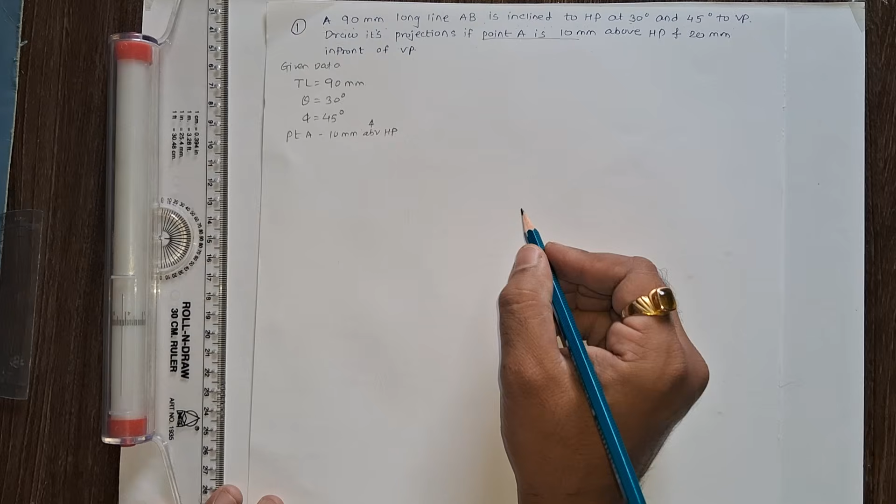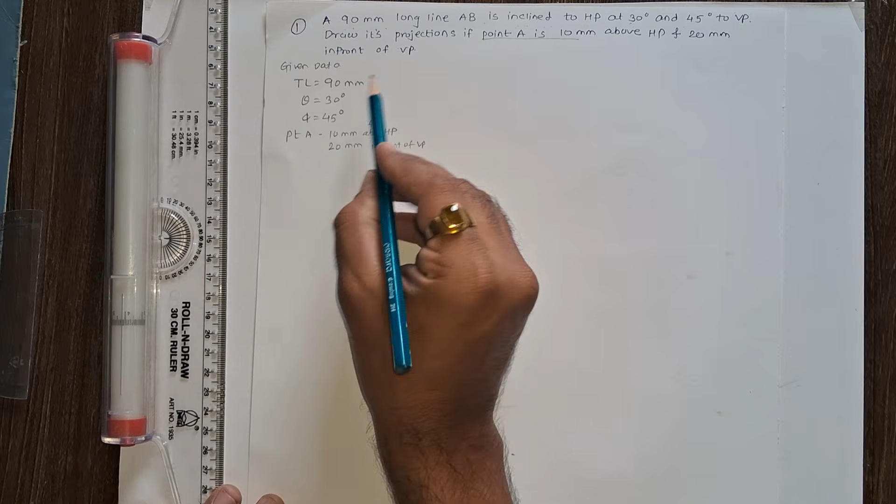We can locate this point above the XY line, and 20 mm in front of VP. In front means we can locate this point below the XY line. So we can solve this problem very easily. This is a basic level problem, and in this problem, true length, theta, phi, and point A location are given.

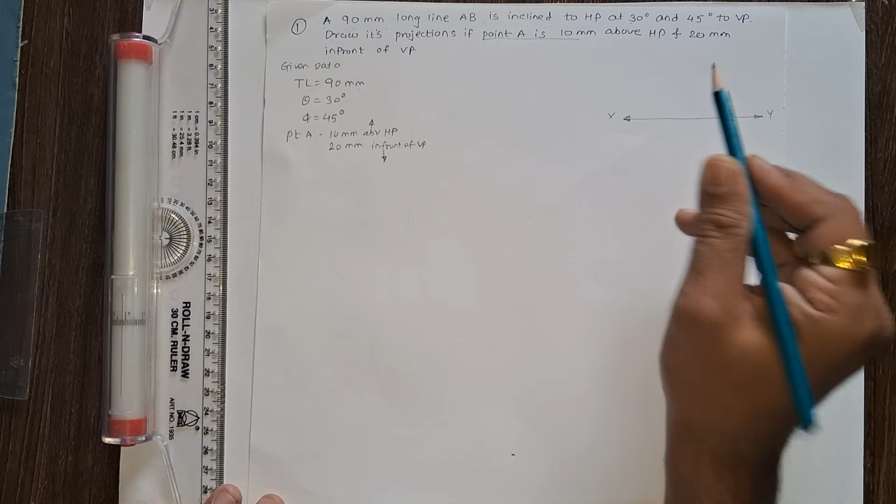So for this problem, we require a reference diagram. So draw this reference diagram. This is the XY reference line. You can draw this diagram freehand. This is locus of A dash, this is locus of A. Mark theta angle. This is point A dash, this is A. Mark phi angle. This is point B1 dash, B2, this is the true length. Project and then rotate. So this is a true length.

If you project this true length up to locus of A, I'll get a B1 point, and if you rotate this point, I'll get a B point. This length is called the plan length; if you join AB, I'll get the plan length distance. From B, we can draw the vertical line directly. I'll get a point B dash. If you join A dash B dash, I'll get the elevation line. It is also called the front view. This line is called top view.

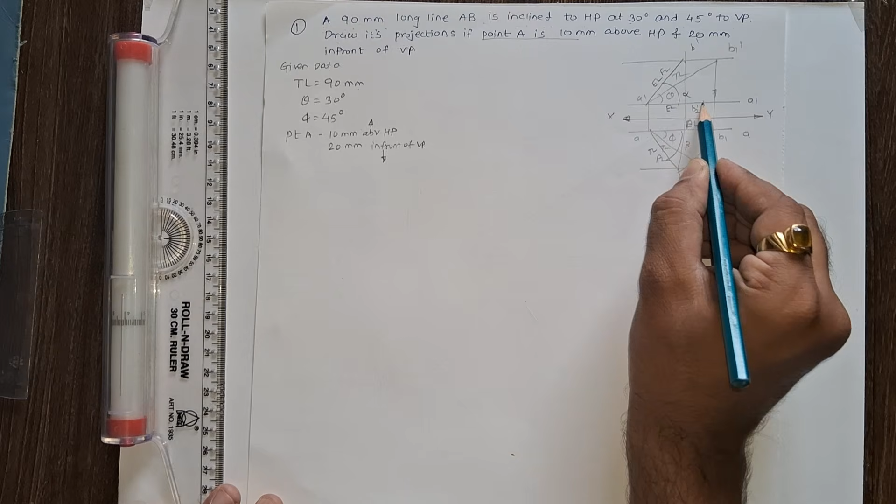So plan length makes beta angle with the reference line, and elevation length makes alpha angle. Here also we have the true length of this line. If you project this true length up to locus of A dash, this point is named B2 dash. This distance is called the elevation length. If you take this elevation length distance in your compass, and from A dash mark an arc, I'll get the same B dash point.

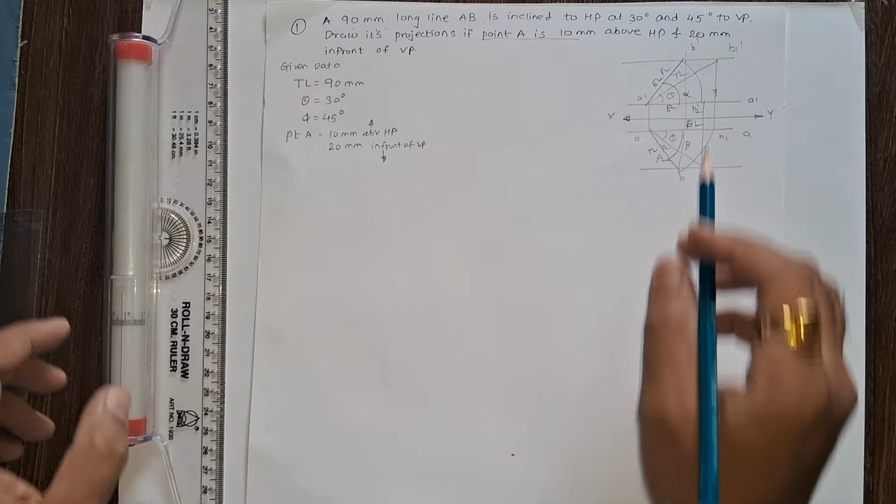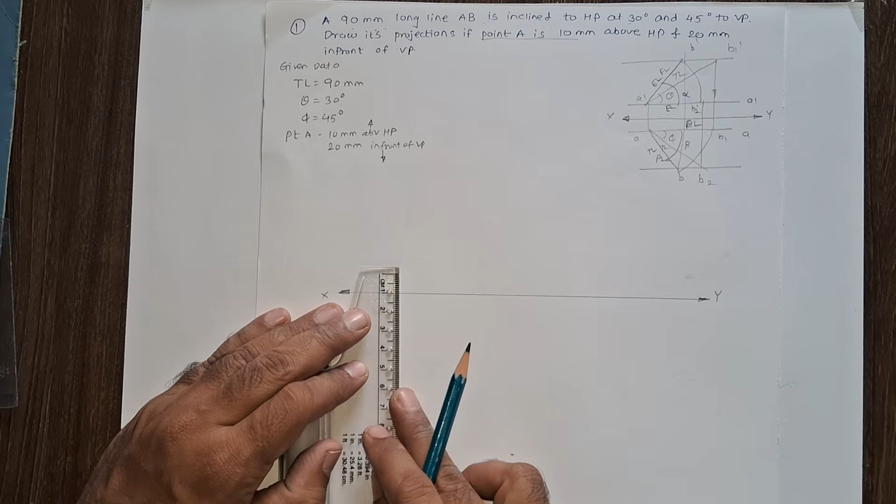So for this problem, for any line problem, we must know this reference diagram. From this, we can solve this problem. Step number one is draw an XY line or reference line. Draw an XY line. This is X, this is Y. Locate point A. Point A is 10 mm above HP and 20 mm in front of VP.

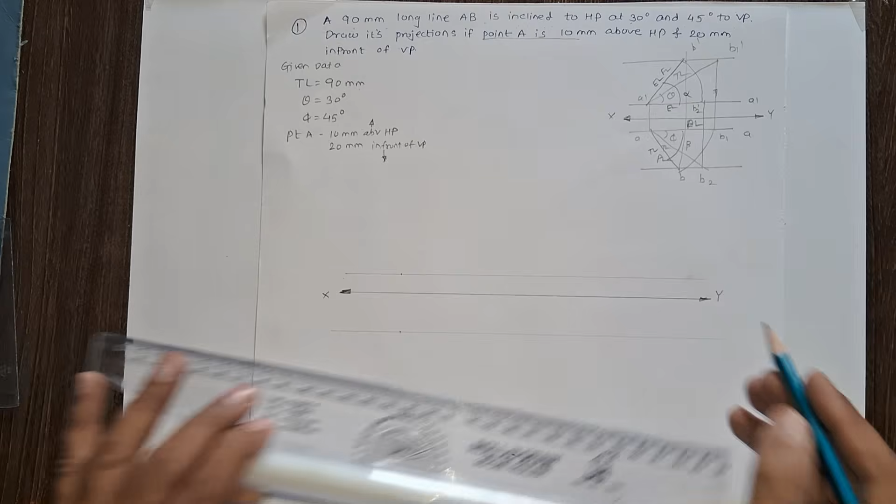So draw the locus line which is passing through this point. On this line, we can mark point A dash and A. This line is called the locus of A dash. This is the locus of A. On this, we can mark A dash and A.

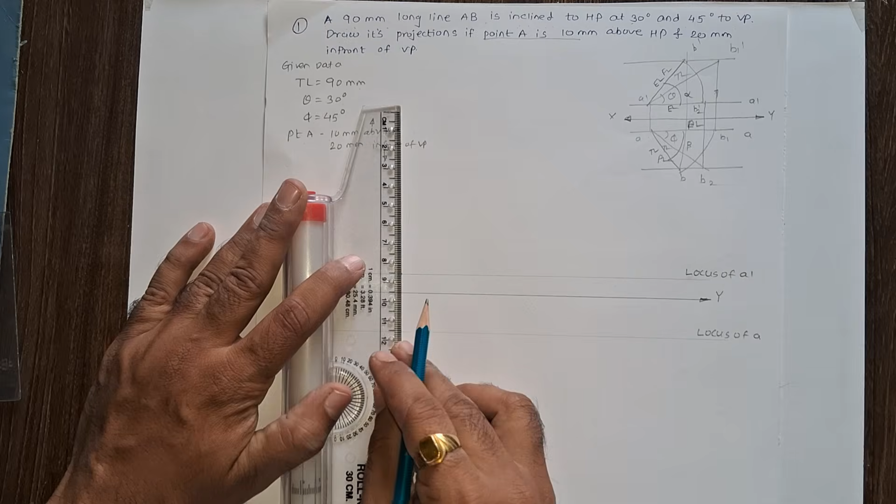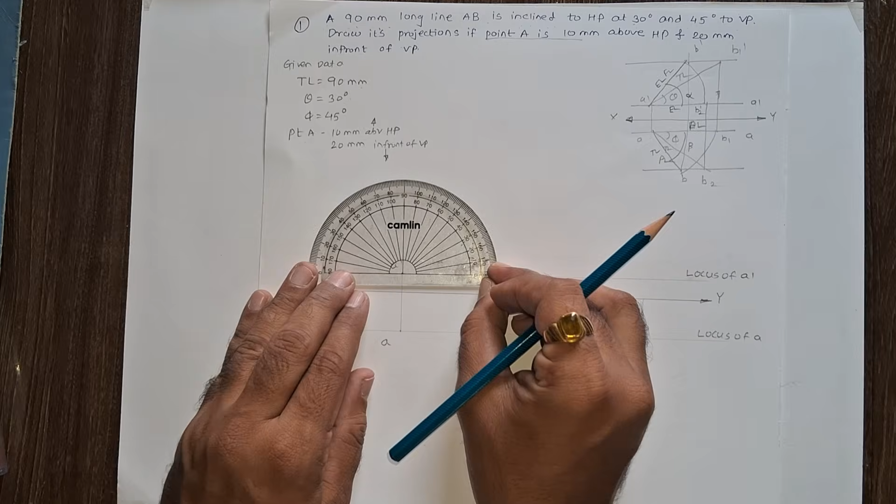So this is A dash point, this is A point. Now in this problem, theta and phi angle is given. So we can mark theta and phi. Theta is 30 degree, this is 30 degree, and phi is 45 degree. So this is 45 degree. So by using thin line, draw this theta angle line and phi angle line.

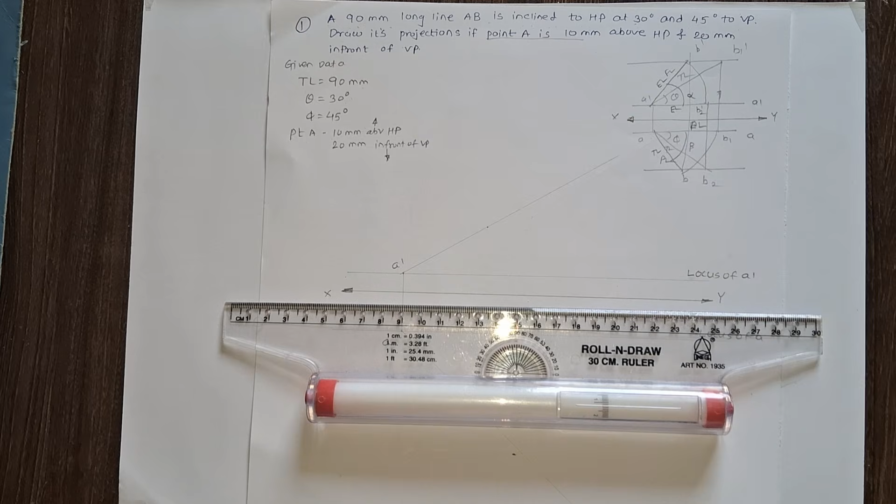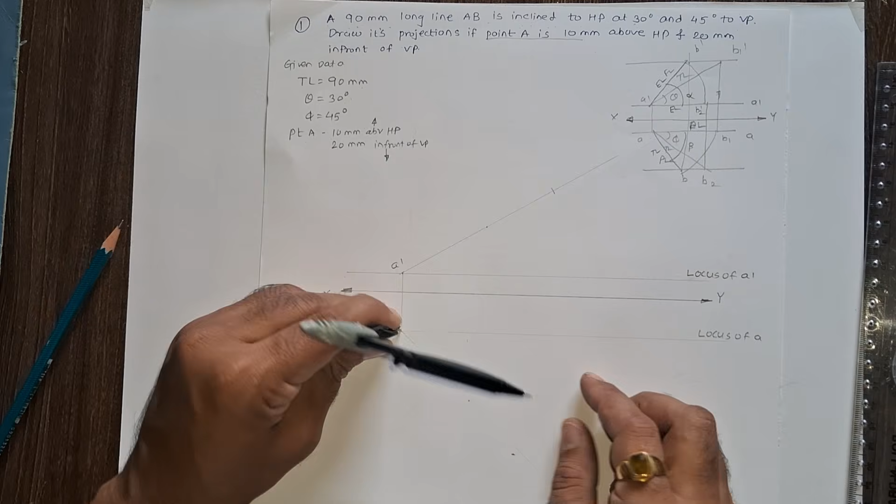Now true length is given. True length is 90 mm. So with the help of ruler, measure 90 mm distance in compass, and from A dash, mark an arc on this theta and phi degree line. So this point we get, this point naming is B1 dash. This you can see the true length point is B2.

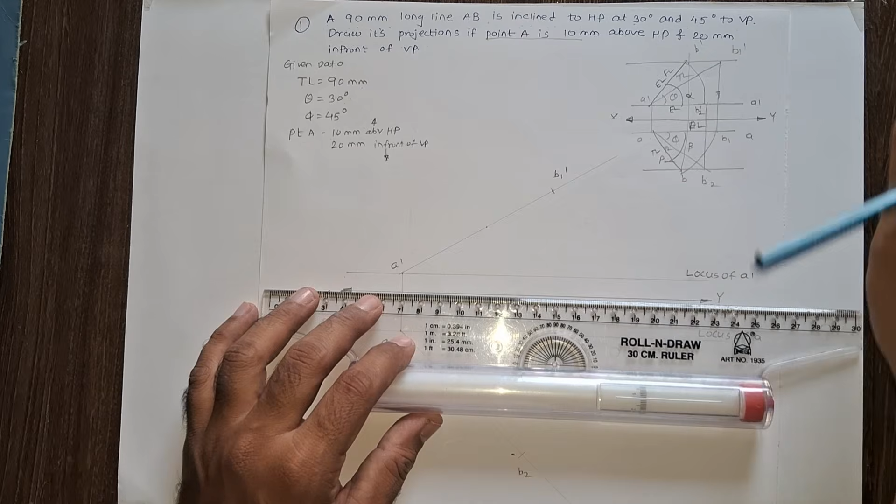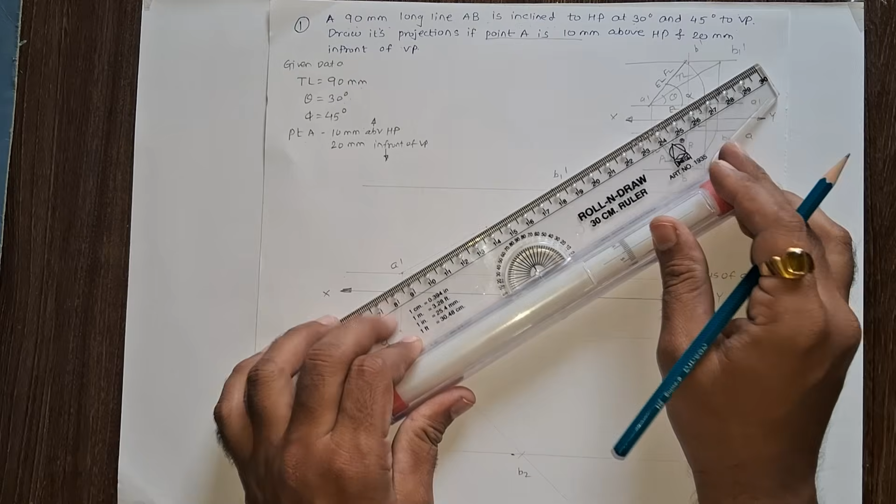Now from this XY reference line, adjust a ruler and draw a locus line of B dash and draw a locus of B. So this is called the locus of B dash. This line is called the locus of B. Now dark A dash B1 dash line and AB2 line.

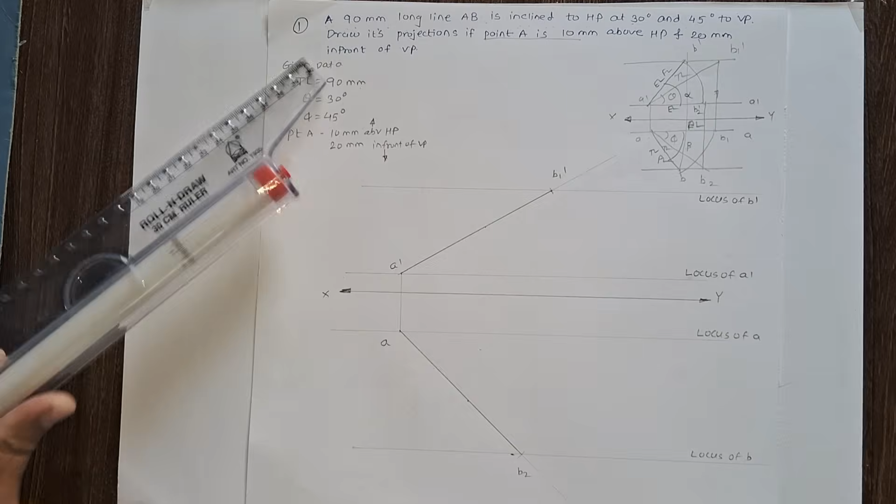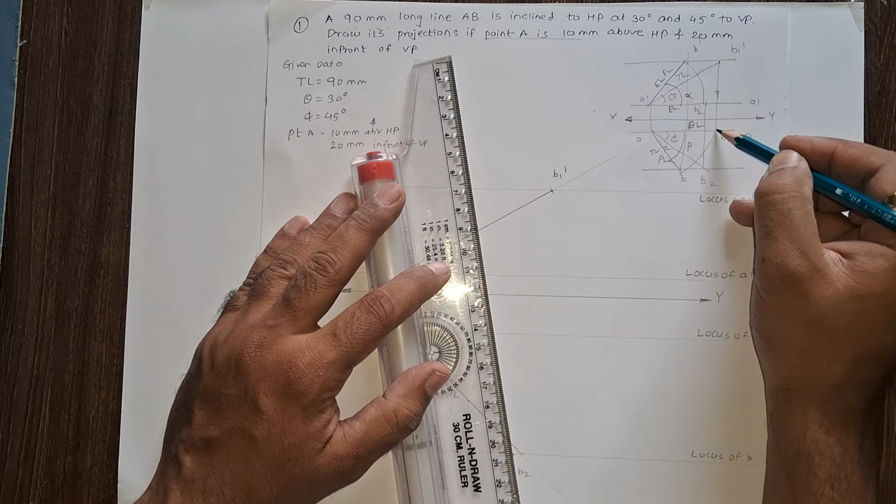Now this line is inclined with HP plane at theta angle and phi angle. This is true length. This is also true length. Now we have the true length line. So project true length B1 dash up to locus of A and then rotate it. So project this B1 dash up to locus of A. I will get a B1 point.

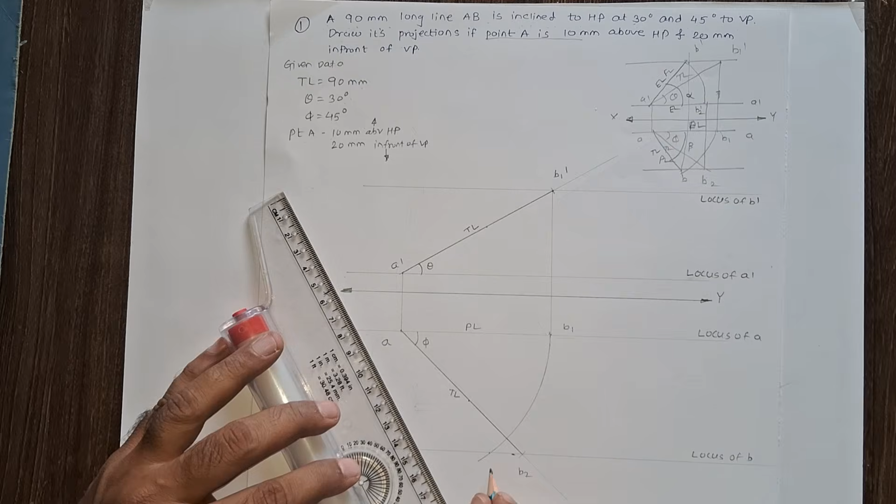Then this distance is called the plan length distance. So take A as the center, plan length distance in your compass and mark an arc up to locus of B. I will get a B point. Join AB. I will get the top view. This is also called the plan length. This plan length makes beta angle with XY or with the vertical plane.

Now similarly we have B2 point. So if you project B2 up to locus of A dash and then mark an arc, I'll get a B dash point. So draw the projection line up to locus of A dash. This point name is B2 dash. This distance is called the elevation length. A dash to B2 dash distance is called the elevation length.

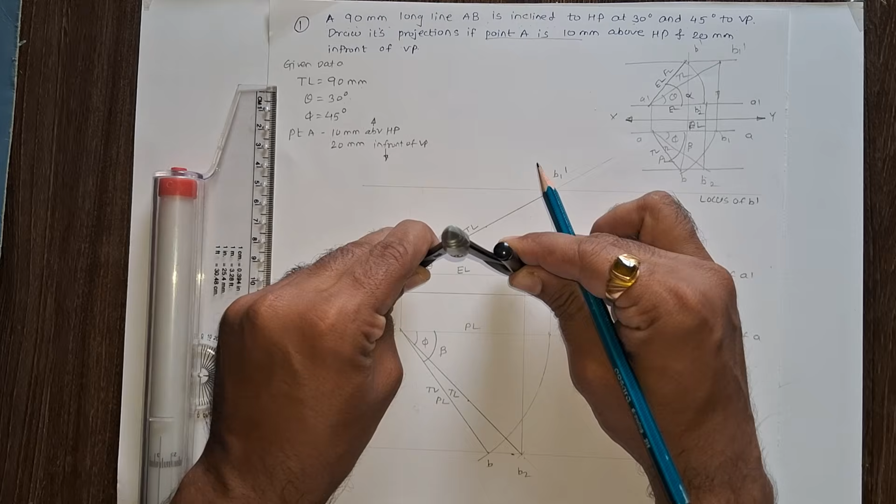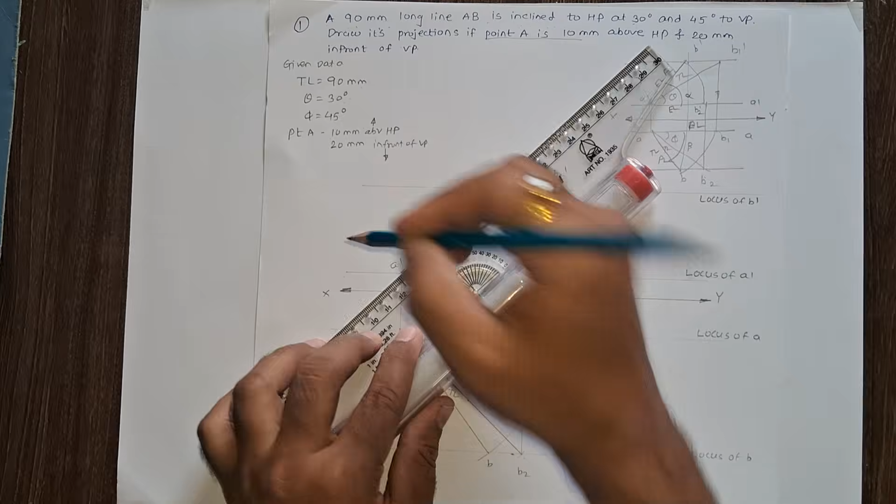Now take A dash as a center and elevation length distance in your compass and mark an arc. This point is called the B dash point. Join A dash and B dash. So this is called the front view. It is also called the elevation length. And this elevation length makes alpha angle with reference line.

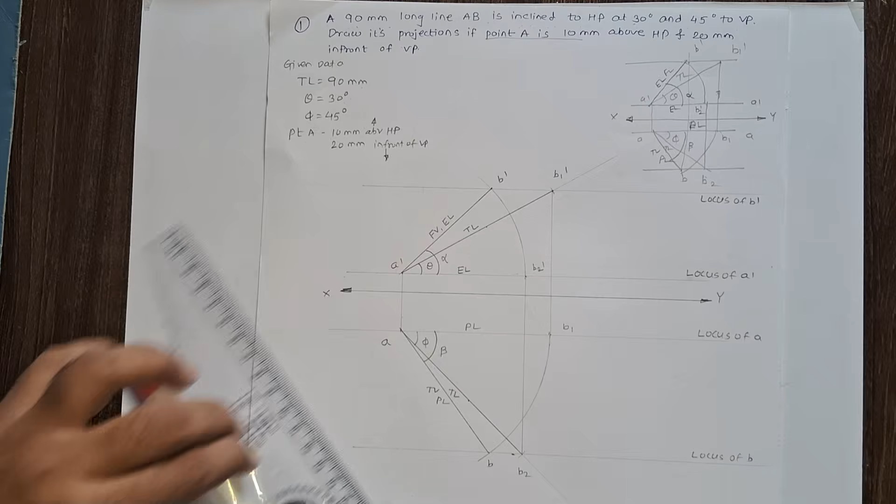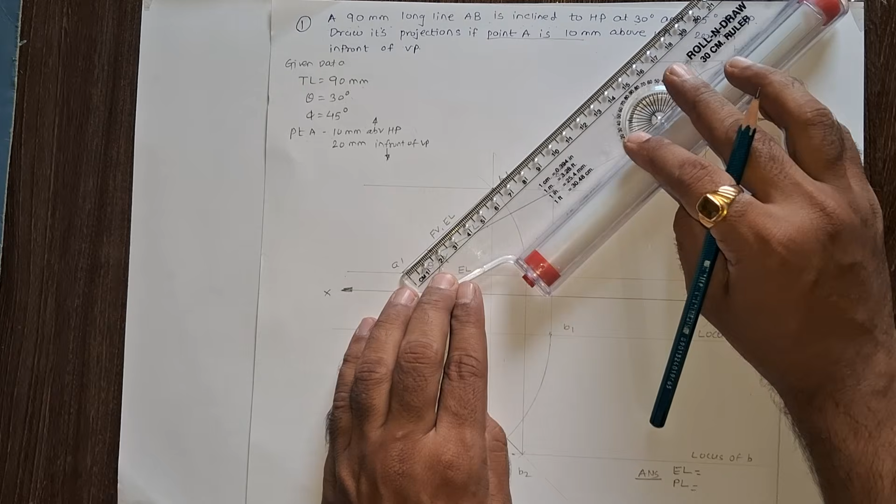Now you can check our solution. If this B and B dash point is on the same vertical line, then our problem is correct. So we can measure alpha and beta angle, elevation length and plan length for this problem. So elevation length for this problem is 65 mm, plan length is 77 mm.

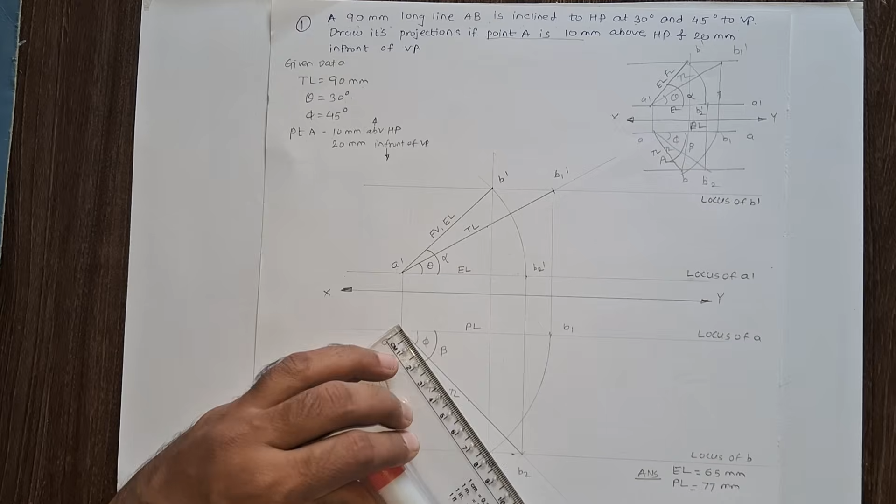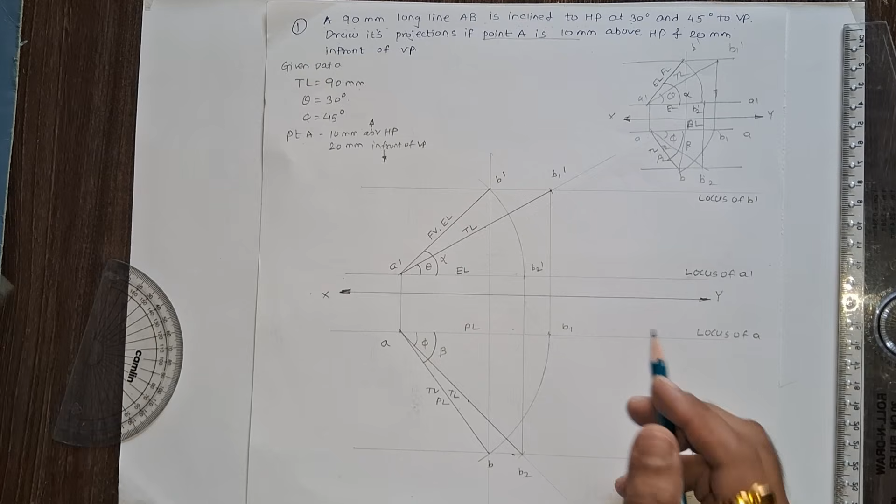Then alpha angle is 43 degree and beta angle is 53 degree. So you can see the solution of this problem. Okay, so by doing these simple steps we can solve this problem. That's the complete solution for this problem. In the next lecture we will solve another problem based on projection of straight line.